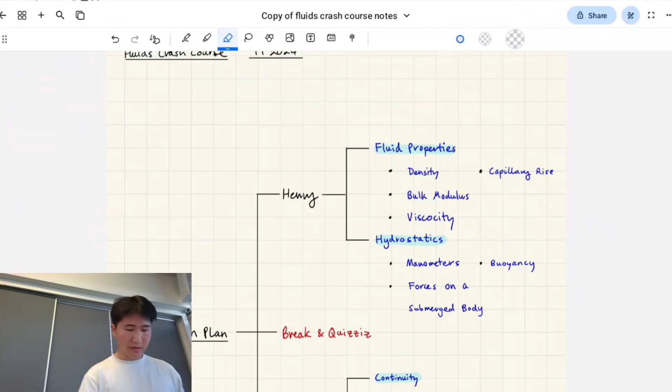First, I'll start with an overview of what you can expect in this crash course. I know in the second half, Zach, you saw it before, but I think for most of you guys, you haven't seen this before.

Basically, I'm going to be covering week one and about half of week two, the hydrostatics portion, before handing it over to Akshara, who's going to deal with continuity. By the way, unlike solids, this course has statics and dynamics. So her portion is the fluid dynamics portion, whereas mine is mostly statics.

Key topics I'm going to focus on are viscosity and forces on a submerged body. I'm focusing on these because in the workshop questions they kind of emphasize these. For capillary rise, surface tension, and buoyancy, I'm not really going to touch on them. Those are topics you're just going to have to refer to in your lectures because I won't have time, since this course is really loaded with a bunch of small topics, especially in the first few weeks.

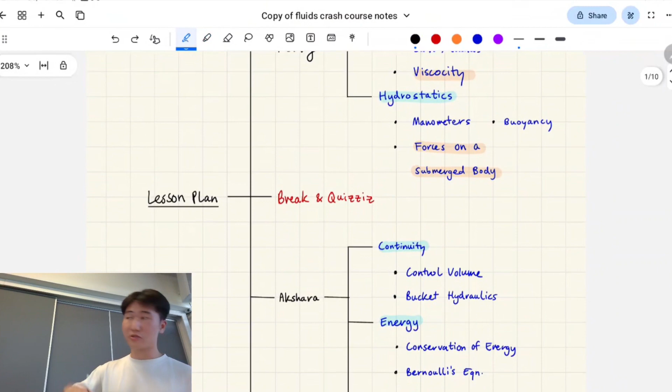We'll do quizzes to test your knowledge in the break. Then Akshara will touch on continuity, which is pretty much, if you remember back to dynamics in 1300, kinematics of fluids. And energy is basically kinetics of fluids. Momentum we won't touch on in this crash course, but you will do it in week 5-ish. The second half of the course we won't touch on at all, but hopefully this gives you a good foundation to work off of.

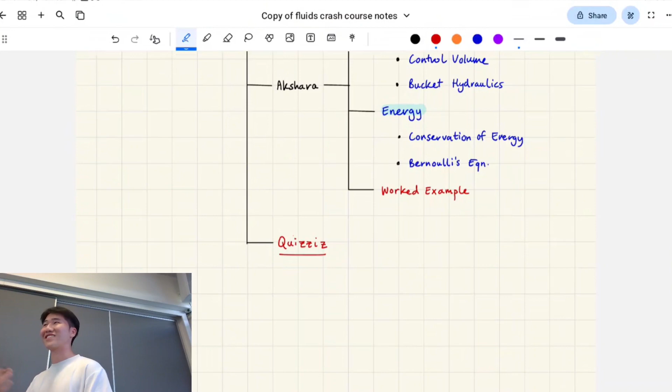She's also got quizzes, so we've actually got two quizzes for you. In the feedback we've gotten for these crash courses, people really like the quizzes because it's a good way to gauge how much you actually know. So hopefully that'll be useful.

All right, moving on to the actual content. I like to start really broad when I teach, and I've taught 1300 for two terms before, so I like to think of everything in terms of 1300. This course is built on the foundations of statics and dynamics, and those are built on Newton's laws. Newton's first law is the law of statics, which you can basically summarize from this simple expression: the sum of the forces is equal to 0.

That's when things are either not moving or in static equilibrium. For example, if I'm not moving right now, I'm in static equilibrium, even though I'm on a planet traveling through a solar system, which is not accelerating. When the sum of the forces is equal to ma, that's the case where things are moving, in other words, it's accelerating. That'll be useful for when you have pipe flow through water, for example.

Whereas the first case is better for when a body of water is still, and something you'll learn about called hydrostatic pressure - the pressure due to water's inherent properties building onto a gate, whatever, causing it to have a bending moment, for example.

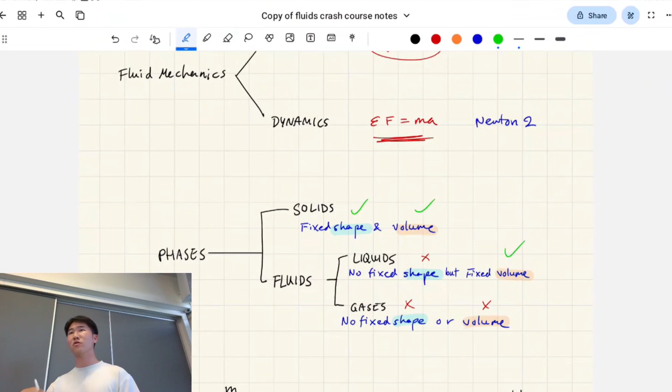Are we all good so far? Okay, let's talk about some fluid properties. The very first thing they dive into for this course is familiarizing you with what fluids are. There are a lot of common properties you'll need to be familiar with to do the calculations. The first one's density.

This one's probably the most intuitive. This is basically your mass, denoted by the Greek letter rho, and it's mass divided by volume. Sometimes they write V for volume, sometimes with a dashed line through it - either way, that's volume. In terms of units, this will be in kilograms per meter cubed. So density is a three-dimensional property, pretty much.

Unit weight - all you do to get unit weight is multiply density by 9.81, your gravity constant. Unless you're talking about aerospace or being on the moon, it'll be different, but every scenario they give you is just going to be this one. So basically your mass becomes a weight force instead. This is m times g, if you remember from physics. Since it's a force, it's in newtons per meter cubed if you're talking SI units.

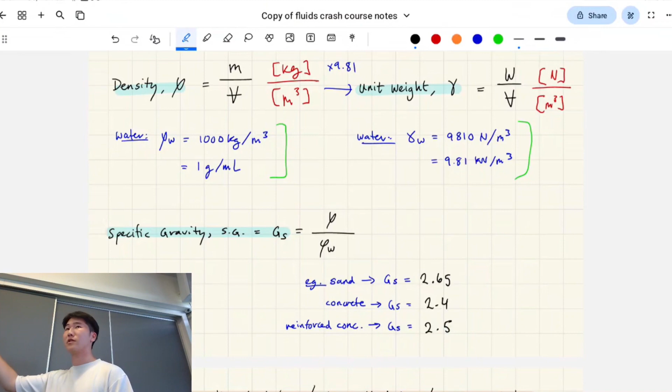Any questions so far? Okay. Raise your hand if you've done material science. Okay, it's all good if you haven't, because I'm going to go through these briefly. This isn't really assumed knowledge, but it's stuff they skip over, and it helps to know the background from material science. So it helps if you've done the course, but if you haven't, it's fine.

So the first thing to talk about, let me just pull up my notes quickly. The first thing is our elastic modulus, sometimes called Young's modulus. Even if you haven't done material science, you might have heard this from engineering studies in high school or physics - they might have brought up Young's modulus before. This is a measure of stiffness. We'll leave it at that for the moment - it'll make more sense when I bring up the other stuff.

The shear modulus is a related property, but I'll come back to that - just explain it later.

Basically, for solids, what I'm trying to point out here is that solid materials will follow these kind of material properties, whereas fluids are going to follow a different one essentially. So let me explain elastic modulus for a solid first, because it's going to help with explaining bulk modulus in a second.

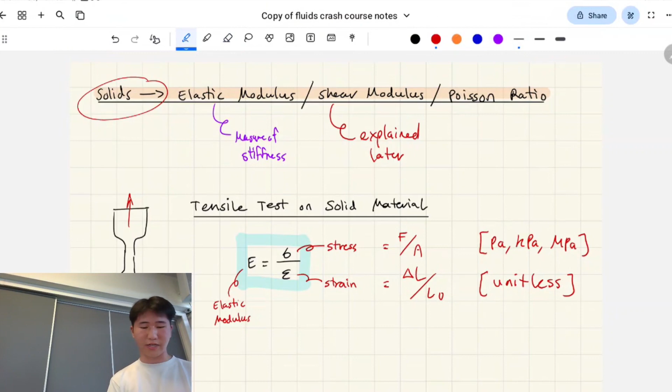In terms of units, you can find this in pascals, kilopascals, megapascals, and strain is unitless because you have meters divided by meters, so it becomes unitless. Pascals is newtons divided by meters squared, so that's like your force divided by area.

So when you have this tensile piece in a lab and you're testing it, it's being pulled apart. That force there is a tensile force, and your cross-sectional area is this one. So you can think of stress like a force, but it's distributed over an area.

You'll get very familiar with this in the second week of solid mechanics if you're doing that course. But if you have the same force and a larger area, for example if your cross-sectional area was actually that big, the stress on it would actually be less, because it's divided over a greater area.

In terms of strain, that's your original length for our test specimen, and however much it deforms would be your delta L, your deformation. So strain is just a measure of deformation, whereas stress is a measure of forces relative to your cross-sectional area.

They skip over this in fluids because they talk about what I'm about to talk about next. But it makes more sense to think about it in solids because this is the simple case basically.

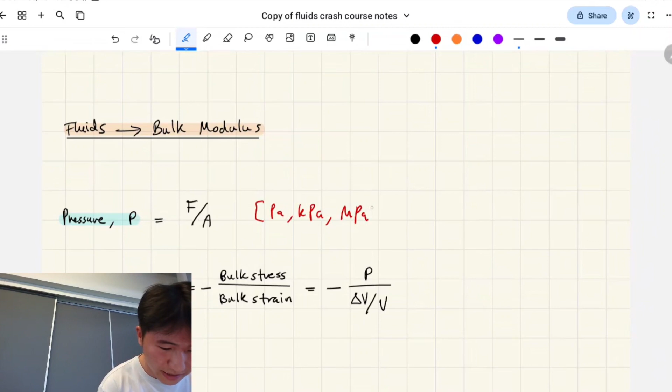So, bulk modulus. Essentially your bulk modulus is going to look very familiar because it's also going to be in pascals, kilopascals, megapascals. But essentially the difference is this applies for fluids. This is a fluid property.

So pressure is basically your fluid version of stress, think of it like that. It's also known as the bulk stress. Your bulk modulus is sometimes denoted by K, I think it's also sometimes denoted by capital B, but it's equivalent to your elastic modulus, but for fluids.

So it's about, instead of tension, it's about compression. Basically you're thinking about it like you're being compressed from all sides to have a reduction in volume. That's actually where this minus sign comes in, because since your bulk modulus is a measure of compressibility, the more the volume reduces, the more compressible it is.

Does everything make sense, hopefully, so far? Okay, cool.

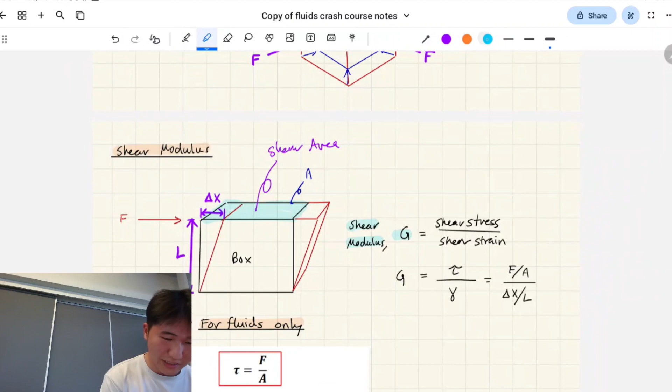Think of it like this. I've got a cardboard box full of, I don't know, CEVSOC merch or something right here in front of me. I'm pushing it like that. And the shear area is actually like here in that case, it's scraping against the ground, and the part that's in friction in that particular scenario would be our shear area.

And then in terms of shear strain, it's denoted by gamma as well. Don't be confused, this isn't the same gamma as unit weight. But it's about your deflection in this direction divided by the original length in the other direction, like that. Anyway, so these are all solid properties, basically.

Viscosity is essentially your shear modulus for fluids. And I'm going to write this down quickly.

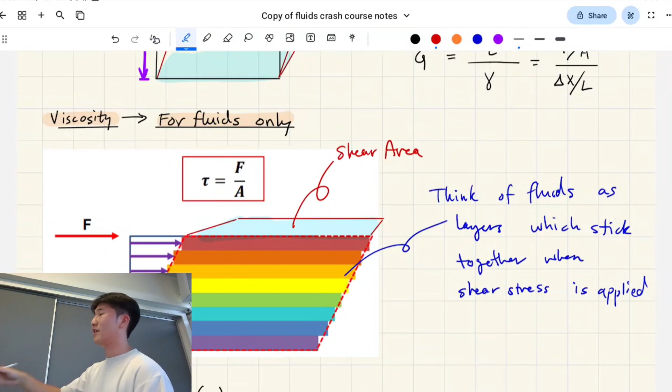You want to think about a fluid as layers which stick together as shear stress is being applied to it. Here's your shear area, basically. We've broken up this fluid into discrete layers, essentially, and they're trying to stick together.

So we moved on to velocity distribution. Have they talked about this in the lecture? Did they mention this? Yeah, I'm getting a nod over here and a head shake over here.

Do you have two lectures this week? It might be starting from the second lecture. Oh okay, maybe they didn't talk about it this lecture because they're talking about assessments and stuff first. It should come up very shortly, but this is like the first kind of loaded topic.

So imagine you have this scenario, right? Aim the camera over here. Basically, these are two plates, so you can think of it as 2D. One's moving, so it's being dragged by a force, and this one's completely still. Here I've overlaid two distributions: this one is your velocity distribution, denoted by u as a function of y being the vertical scale, and here is your shear stress distribution.

And this is your base case, your simple case, where we have a linear velocity profile. So that's linear, right? Let me just write out a couple things.

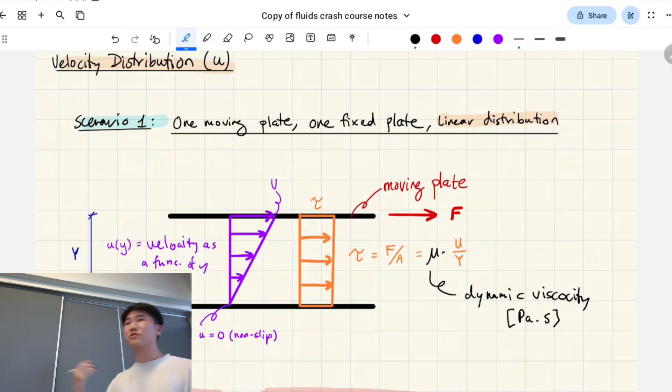There's another formula for this, which is very important. All right, so this is mu. I'll explain this—mu stands for dynamic viscosity. This is kind of a new concept. Its units are pascals multiplied by seconds, and it's basically a material property.

It measures the resistance to flow. You can see in the corner here, this is a predictable number for water—that's mu of water at 20 degrees. So you can see that it's temperature dependent as well. Our normal case is that it's at 20 degrees basically, so that's the number you're going to be using.

What I've drawn here, capital U divided by capital Y, this is your velocity gradient—that's your gradient, so the slope there. U max, denoted by capital U, is this number here, divided by your total depth. You can only use this formula if it's linear. It's the same as when you were graphing straight lines in year 8—remember this, y equals mx plus b, the slope m is rise over run. That's the same thing, but you're only allowed to use that as long as you're not dealing with a parabola or something. Yeah, straight line.

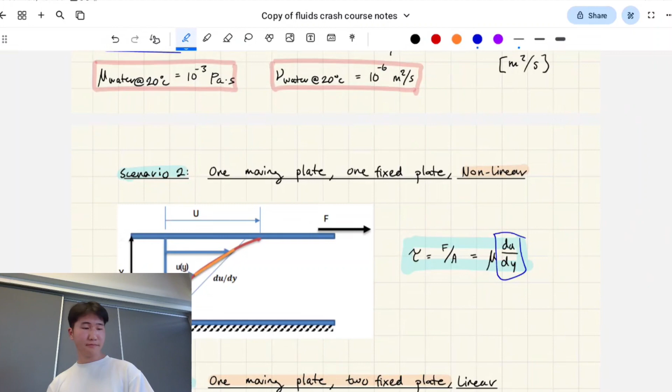The only thing that changes is that it's not necessarily always constant, because the gradient's not always constant. I'll show you an example where it's not constant—here you've got a moving gradient basically, so we have to use calculus, du/dy. It'll be a function of y.

I'm just showing you a few different scenarios here. In this case we have one moving plate, which is the middle one, and two fixed plates. Say we have a linear velocity distribution—what would the shear area be? You don't have to give me a number, but how would you find it?

I'll draw this out in a perspective view. That's the moving plate, being pulled this way. Here's your fixed plates on top and bottom. It'll be underneath, but also on top, wouldn't it? It's not just because of the fixed plates—there's fluid both above and below it, so your shear area is actually shearing here and here on the plate.

If this is B, B is your width going into the page—you can't see it in this elevation view, but I've listed B on the side. B multiplied by L, that's that rectangle there. It'd be 2 times that, because the top and bottom parts are both being sheared. So that's your shear area.

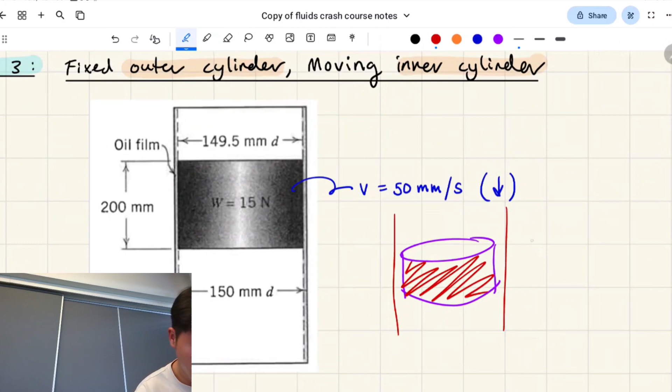This whole thing's moving down due to gravity—W is the weight force. Basically the shear area looks like this: it's on the outside of the inner cylinder. So that's pi d h, with h being your height. This is literally like geometry from year 9 or 10.

And your velocity profile in this question—you have to enhance to see this. That's how it's moving, because the fixed plate in the drawing I've done is on the left, and the moving plate, which isn't a plate, it's a cylinder, is on the right. Makes sense?

Here's another case: we have a fixed outer cylinder and a moving inner cylinder, except instead it's twisting—you have torsion essentially acting on it. So what would the shear area look like, you reckon? Again, this is parallel forces you're thinking about—it's going to look like this.

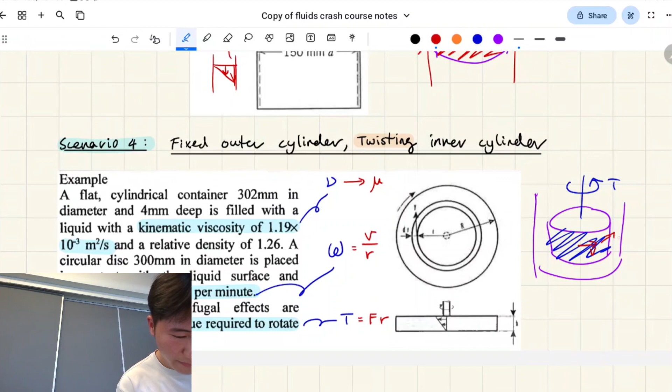So essentially the same part of the cylinder is shearing, it's just the force being applied kind of this way rather than that way.

Any questions? Is this the only four scenarios we're going to get? The only possible scenarios? This is the most complicated one I've seen, so it doesn't get any harder than this basically.

I didn't cover surface tension, capillary action, and vapor pressure, but these are still part of your week one fluid properties, just lesser topics. If you want a good read, I've sent through Barney's notes—they're incredibly good and have all the formulas you need in case they throw you a question. But in the workshop questions I didn't see anything on these topics. It might just randomly show up as a multiple choice in a weekly or midterm, so it's good to study as a low priority thing.

I haven't talked about hydrostatics yet, so I'm going a bit slow. Before this I was just talking about general fluid material properties. Now we're talking about hydrostatics, which is for bodies of water that don't move.

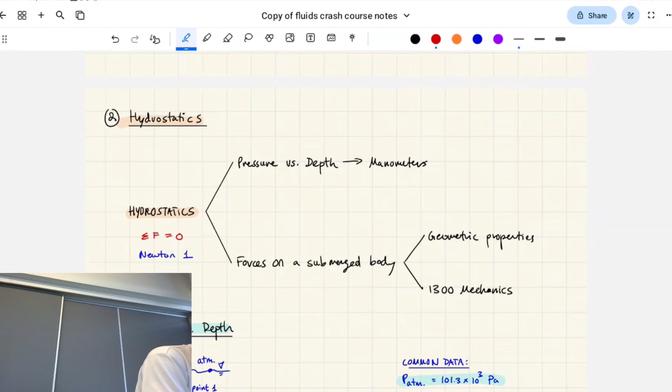The first thing to realize is that pressure varies with depth.

It varies linearly, essentially. This is kind of a gruesome example, but do you remember the submarine full of rich people that went down? OceanGate, yeah. It went really deep into the ocean and it imploded due to hydrostatic pressure, and everyone inside got compressed essentially. That's what bulk modulus can do, it's about compression forces. As gruesome as that is, it's good to think of that scenario when you think about what water does in terms of hydrostatic pressure.

So we're just going to dive into it. We have two points randomly drawn here. Do you see how I've drawn them laterally, a bit off center? It's because the only thing pressure varies with is depth, not horizontal position. So we can still do calculations on these two points even though they're far apart that way.

Here's the general formula. The pressure at spot 2 is the pressure at spot 1 plus your unit weight multiplied by height. Alternatively, you can call this rho g if you're doing your calcs that way.

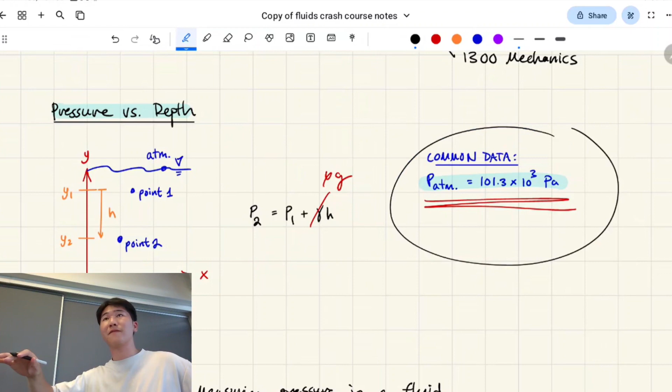Otherwise, actually, you know what, I'm kind of overcooking this explanation, we'll leave it at that. But just keep in mind there are two types of pressure: absolute pressure and relative pressure. Absolute pressure would include your atmospheric pressure as your baseline, but relative pressure is only the pressure added on top of your atmospheric pressure.

So you'll see that come up in questions. Do we have questions so far? Yeah, I'm gonna go a bit quicker.

Manometers are just a measuring device for measuring pressure in a pipe system. Here's a cross section of a pipe, so there's a pipe flowing in and out of this page like that. Then you have your manometer connected to it. The base case is that on one end you have your pipe and the other end it's open to the atmosphere, and then you're given this fluid height, and you calculate the pressure in the middle of the pipe.

Here we have a U-tube manometer, and you're given atmospheric, it's touching the atmosphere here. You have to add on the pressure due to mercury, and subtract off the pressure of water. So it's going to come up with some pretty funky equations, but I'll just jump on.

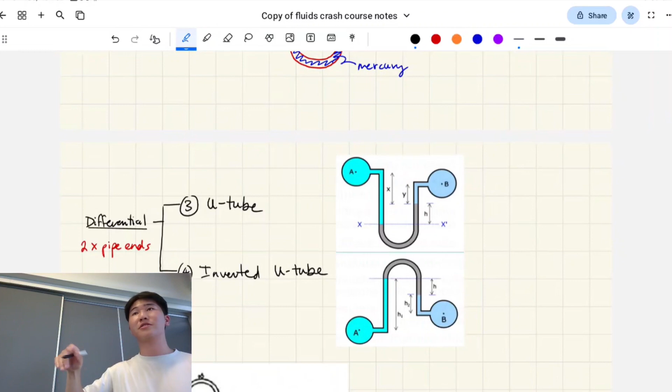Here's another case, these are your differential manometers, which have two cross sections that are measuring off of each other, so it's not connected directly to the open air. Here's an example of an equation: the pressure at B is equal to the pressure at A minus this pressure. It's minus because your depth is decreasing, as in it's going upwards, and since it's going upwards you're relieving pressure. You're relieving pressure again, and then finally you're adding pressure for this third type of fluid.

Does that make sense? Okay, sorry, this makes more sense when you do the questions than if I'm just loosely explaining it to you.

Here's my last topic that I'm going to talk about, and this one helps if you've done 1300. Can you put your hand up if you've done 1300? I actually already knew the answer to that question, sorry Anushka. But yeah, basically, this is the only part of this course where statics from 1300 comes in.

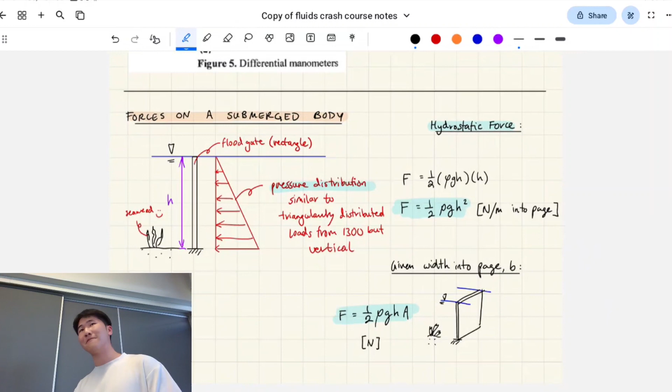So I'll show you the default case. Here you have a floodgate, which is a solid material, and you have this pressure distribution due to water, which linearly increases, like I've been saying, so you have this triangular distribution. Here I've drawn some seaweed, but this is just to show you it's an elevation view, so side on, basically.

These are the general formulas, but let me show you how everything plays into account. So we're looking at this floodgate, where H is the height of the floodgate. Here is rho GH, which is your pressure at this depth, measuring the biggest part of that pressure distribution. The way I've gotten the force is literally the area of that red triangle I just drew: half times your base times your height of the triangle. That's it.

However, this is newtons per meter, because this is per meter run into the page. Your actual force, if you're given a width b, that b dimension goes into the page. That's the one we can't see in that diagram.

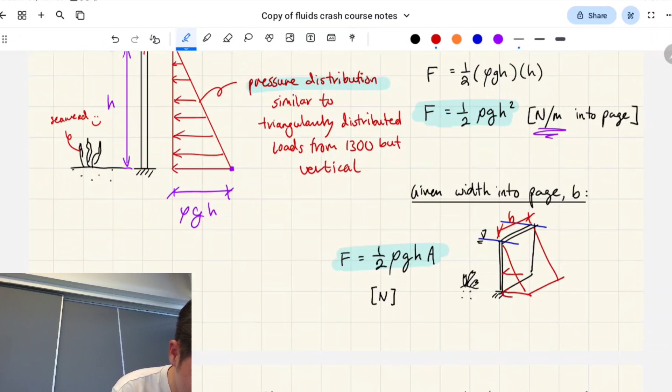That's our pressure distribution prism, it looks like that. Rho GH, that's H there. That's our seaweed. So the actual force is the volume of this pressure distribution prism, this 3D shape. That's how you calculate the force.

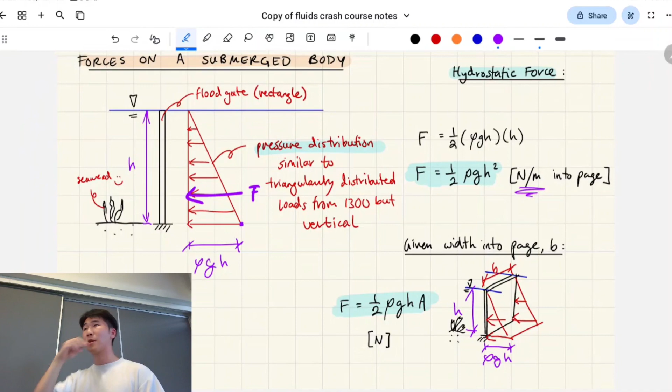From 1300, you might remember your equivalent point loads, which is just reducing this distributed load into one point load. It works the exact same as it does for loads in 1300. So for a triangularly distributed load, it's 2/3 from the small side, 1/3 from the big side, and the force is just what we calculated before. That'll make sense later, I'll elaborate on that.

So here's our first scenario. Basically before, our gate was touching the top, so it's a triangularly distributed load. However, now our gate is some amount of depth into the water before it even starts.

So the pressure on the gate is actually going to be trapezoidal. By the way, this is just a stupid thing, but you're going to see this come up a lot: this is the gate, except they don't explain what this is - this is the cross section of the gate. It's like if you're looking at this gate, that's your eye view. It's not some random gate that's just there, it's the same gate, just viewed from a different angle. They never explain it to you, but that's what it is.

Here's the pressure distribution acting on this gate, so it's actually like that. Anyway, so we have a P min and a P max this time. We're just measuring the dimensions of our trapezoid essentially, and then we have that formula. Here's our pressure distribution prism, and in order to get the force, you get the volume of this shape, and then you get the force.

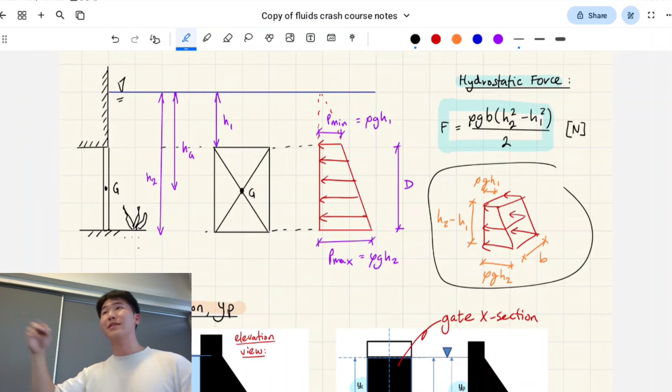Point of application, YP, that's this depth here - my notes. So basically YP is what I was talking about earlier, so this would be YP. It's the point at which you're applying your force on your gate, it's where the concentrated loads would be.

For a trapezoid, it's a little bit harder to find, because YP is like this number. YP is kind of a bit harder to find when it's a trapezoid, essentially, because it's not necessarily 2/3 from the small side.

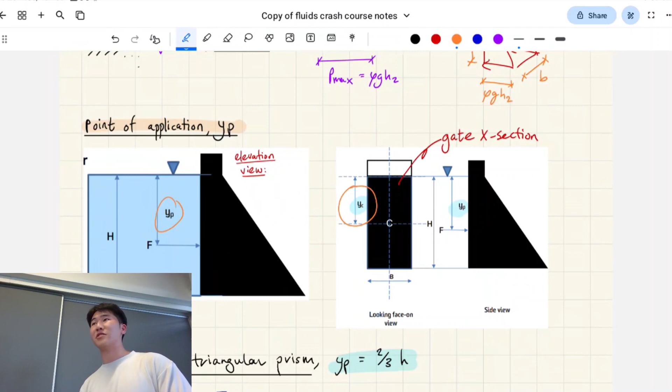YC, this is where your solid mechanics will come into play, because YC is your centroid in the Y direction. That's a geometric property of that gate, because again, this gate is a solid, it's not a fluid, so we have to apply our solid mechanics knowledge to this. This is what I mentioned earlier: for a triangle, YP is just 2/3 of the height, so two-thirds from the small side.

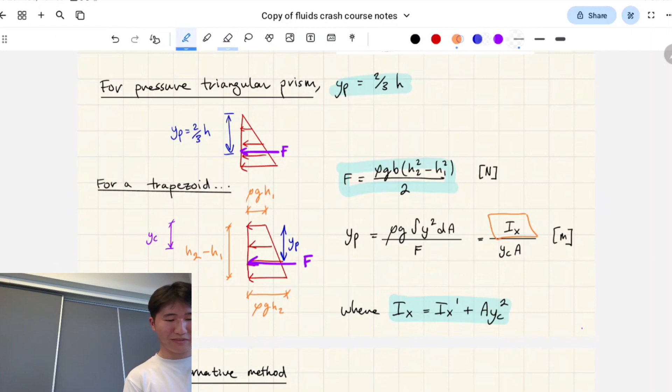Okay, I'm just scaring you because I think there's a better way to do it than integrating. You can apply this formula if you like, but this is your parallel axis theorem, and this is your moment of inertia, a geometric property from solids. Sorry Nishka, I'm probably speaking a different language to you right now. We'll run over this later, but I'm conscious of time so I'll speed through. I'll send you the relevant part of my solids crash course so this makes more sense.

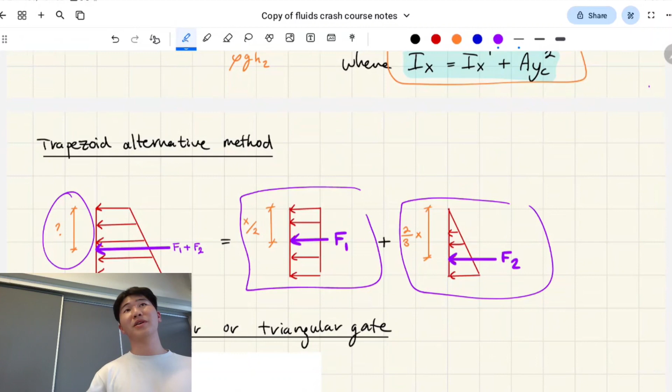This is useful when you have gates which aren't rectangles. Rectangle is the default case for gates, but here's a triangle they could run in the lecture, and you might have a circular gate - I've run a circular gate in one of the questions before, that's why it gets tricky. Here's my trick for trapezoids though: the easiest way is breaking it up into a rectangle and a triangle, since that's all a trapezoid is. When you do that, you can find the forces very easily, as well as the point of application, since that's hard to find for a trapezoid directly.

Yeah, that's the end of my section. These are some geometric properties, your moment of inertia from solids. Does anyone have questions? All right, let's do a quick smoke break, then we'll do a quiz, then hand it over to Akshara. How about that?

All right, so yeah, 36%, let's go. Last time was 25%.

Okay, so bulk moduli - it's a measure of compressibility, but basically a higher bulk modulus means it's less compressible. So a solid has a higher bulk modulus than water, which has less than air. Do you remember the negative? The negative makes it the other way around. Steel has a value that's basically negligible - that's why it technically exists, but since the number is so irrelevant for compressibility of a solid, they don't really care about it.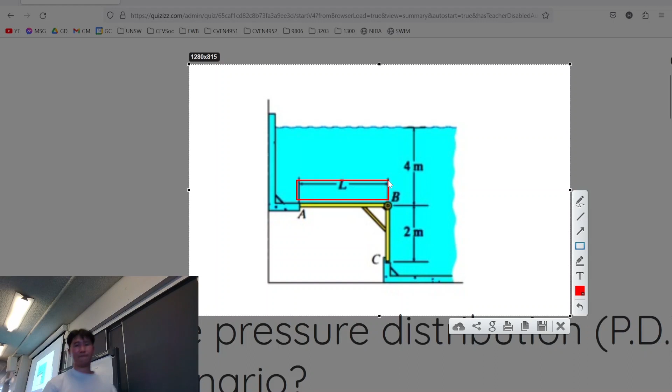This one's a hard question conceptually, but I wanted to include it since I didn't have time to talk about it, so I thought I'd see who could have a good crack at this. I'm going to overlap this - the pressure distribution at these two points, because they're at the same height. Point A and point B are at the same depth, so they have the same pressure, meaning we actually have a uniform pressure distribution, and the pressure is acting at the gate, that point of focus - put down arrows acting at that. Whereas between B and C it varies with height, and it's not going to be a triangle because we know it isn't on the top surface. This is the case we talked about before, for this part of our gate. This is kind of new - this uniformly distributed part only happens when we have a completely horizontal surface.

This way? Yes. Good. Just when you're ready. Okay, alright, try that. Ready? Oh thank you. So we're going to learn about - oh my god, this thing, it's a bit of a - wait, should I mute? Okay, but they'll hear it in your laptop, right? Okay, it's fine, okay.

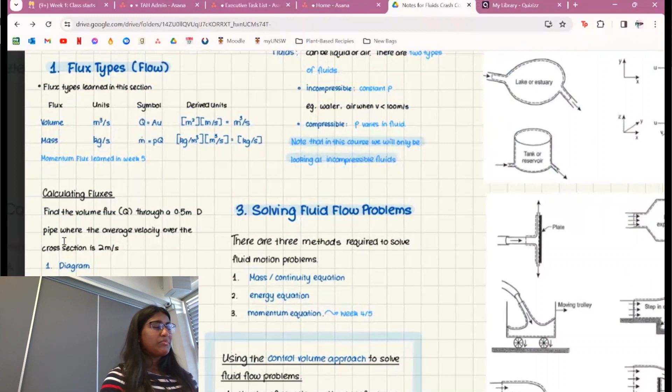So continuity - this is the second week of the fluids course. I'm going to delve into the different types of continuity questions you guys could get. They're all largely based around the same principle though, so as long as you get the principle of conservation of volume and mass, you should be able to solve any continuity problem. Then in the second part of my section, I'll delve a little bit into the energy equation and Bernoulli's equation and how that relates to continuity.

Okay, so starting off with the first concept, flux is basically another word for flow. In your continuity problems, you will be asked about 3 types of fluxes, 2 of which I'm going to go through in quite a bit of detail.

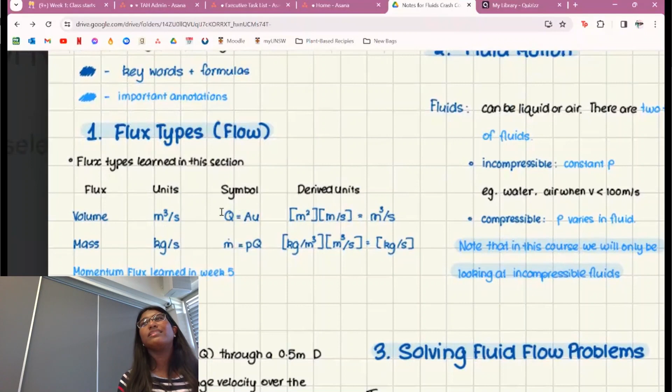The first one is volume flux. The units for those are meters cubed per second, and the symbol is Q. Before I go on, I found with fluids that the units caught me out in a lot of questions, so I would be really careful when converting between the units in the question and the units they ask for in the answer.

The second part is mass flux, which is similar, but it's in a mass per time form, so kilograms per second. The symbol for that is M with a dot above it. The equation is density times Q, which you found up here. So for example, a question might ask you to find the mass flux of a control volume, which I'll explain in a second. But if you have to find the mass flux, you usually have to find Q, which is volume.

And then the third one is momentum flux, which you guys will learn a bit more about in week 5. But it's a similar concept as well.

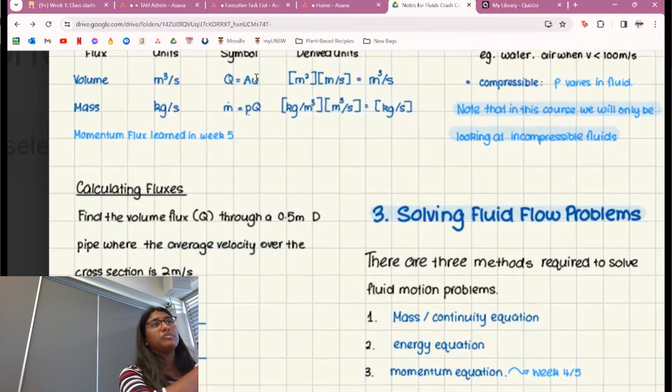I think the easiest way to explain what flux is is to go through a very simple example. This one is just finding the volume flux Q through a very simple system: a 0.5 meter diameter pipe, and they've given you the average velocity over the cross section. You'll notice that in the volume flux formula, you've got an A and a U. U represents the average velocity, which they've given you in the question, and A will always represent the cross-sectional area through which the fluid is flowing.

So in this case, with a pipe with a diameter of 0.5 meters, we have to find the area of that circle before we find Q. I've done the working out here - I've inserted the area of a circle formula, and then multiplied it by 2, which is the average velocity given in the question. Does everyone understand that example?

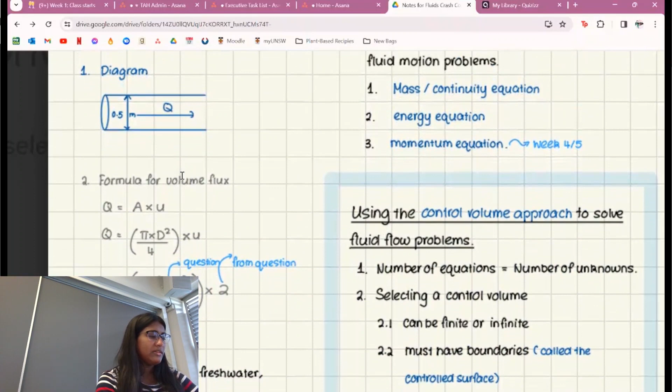Another way they could make the question more complicated is by including mass flux, which would get you to consider the density as well as the volume flux. Here they've given us the same question, but with 2 different formulas - one for freshwater and one for seawater, both of which have different densities. It's almost the same - you just take the Q you found in part A, 0.393, and multiply it by each density to get your mass flux.

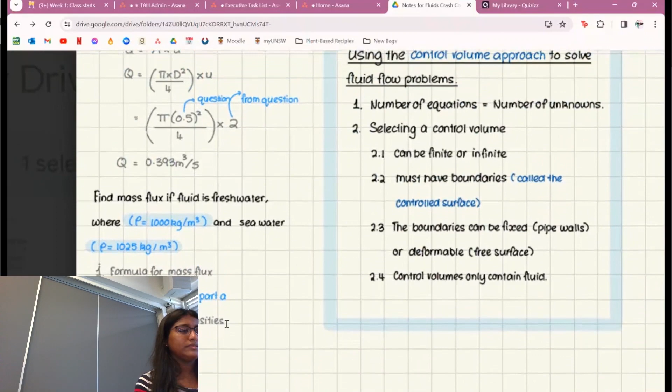Okay, just a bit of terminology before we move on. Often in this course you'll get a few terms thrown around, two of which are quite important: incompressible and compressible flow. Fluids in general can be liquid or air, and depending on which one it is, that determines whether it's incompressible or compressible. Incompressible fluids, which you'll be working with pretty much all throughout this course, have constant densities.

That's usually water of any kind, and then air when the velocity is less than 100 meters per second. Compressible fluids are where the density actually varies in the fluid, but you won't really be looking at that in this course. Does everyone understand the difference?

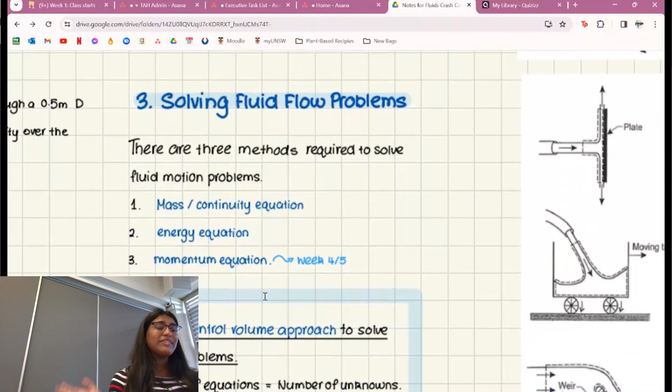Okay, so the third section of this unit is solving fluid flow problems. You'll remember I mentioned that the principle behind all of these problems is pretty much the same. There are three methods you can use to solve fluid flow problems, two of which I'm going to go through with you today. The first is the mass/continuity equation, the simplest equation you can apply to any continuity problem. The second is the energy equation, which I'm going to go into depth with in the next section. The third is the momentum equation, which you guys will learn about in week 5 or week 4.

Before we get into any actual problems, I just wanted to run through quickly what a control volume is. Understanding what a control volume is basically allows you to visualize any pipe flow or fluid flow problem. When you're given a problem, you won't always be given the diagram, which means you often have to visualize it yourself and draw the diagram yourself. You can't really do that without defining your own control volume.

That means determining where your fluid is flowing, the direction it's flowing in, and the shape of the water storage section. For example, if you've got a pipe expansion, or water flowing out of a tank, then that storage section will be like a cylinder.

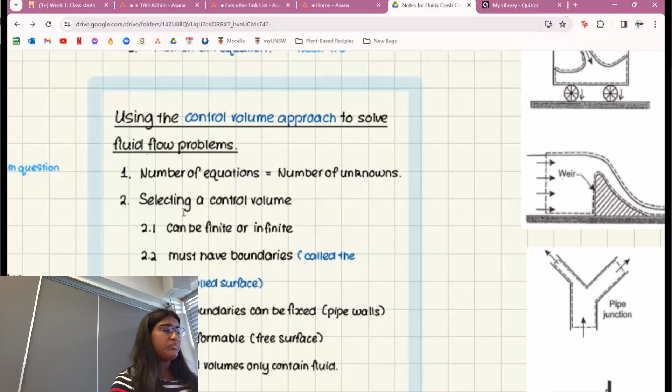The second part is to select a control volume, which I will go into the different types in a second. A couple of things to consider when defining your control volume is that it can be finite or infinite, but it has to have boundaries, called the control surface. The boundaries can either be fixed or deformable, like a free surface, for example. And the control volumes can only contain fluid, so liquid or air.

Here we have some examples of control volumes. The first three are kind of important with the diagrams to the right. They show that with each continuity problem, depending on what your control volume is, that will tell you whether you're working in a single dimension or multiple dimensions.

As you can see in the first problem with the pipe junction, you're only considering the horizontal direction, or the flow velocity in the horizontal direction. But then once you get down to the tank or reservoir, there's obviously a change in depth as well, so you're considering the Z direction as well as the Y direction, because you've got quite a large storage area that considers both the X and Y direction.

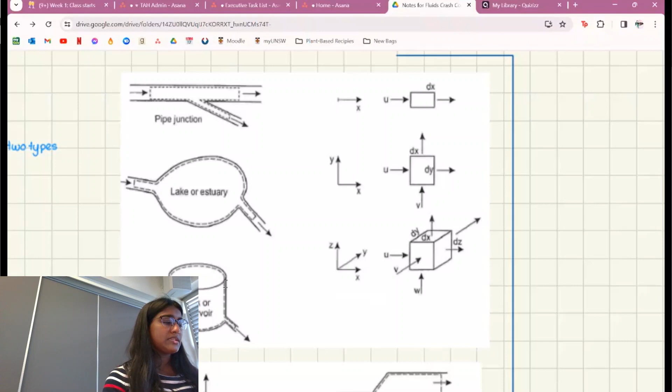Other terms that you might hear when solving continuity problems are pipe expansion - I'll go through a pipe expansion example with you in a second - things like moving trolleys, weirs, plates, and pipe junctions, which I'm going to go through as well. They're all types of control volumes that will help you visualize a continuity problem.

Okay, so I'm going to run through a couple of examples now - continuity examples. The first one I'm going to go through is using the continuity equation. Remember, that's our first method out of three methods to solve pipe flow or fluid flow problems. We're going to use the continuity equation to solve an example in a finite-sized control volume.

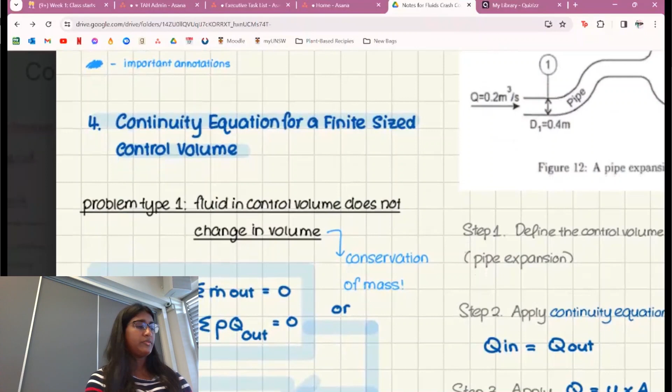Problem type 1 is a fluid in a control volume that does not change in volume. This is where the input is equal to the output in mass and volume. This is the derivation here, but it basically is derived to become this equation: the sum of the volume flux inside the control volume is equal to the volume flux out that leaves the control volume.

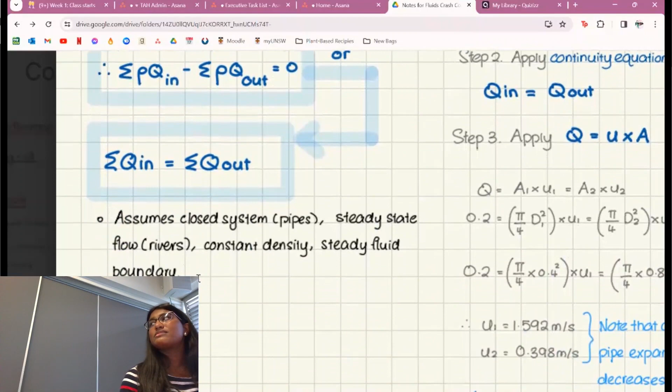If you're going to note down anything, I would say make sure you note down these, just because they're the assumptions that you make when using this equation. We're assuming that we're in a closed system, like pipes, for example. We're in a steady state flow, which could be a river. We're using a constant density, which I mentioned when defining our control volume - that's very important. And we have a steady fluid boundary.

Okay, so this is the example here. All they're asking you to do in this question is to determine the velocity at point 1 and point 2. As you can see, at point 1 we've got quite a small diameter, 0.4, and then the diameter doubles at point 2. So they've given us both diameters, they've given us the volume flux at point 1, and they're asking us to find the velocity at point 2.

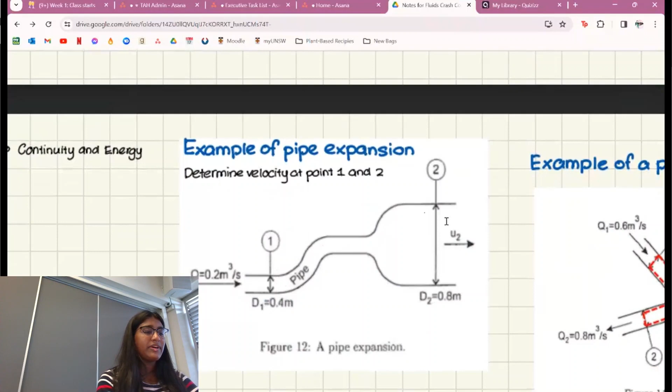So just before we get into the solution, does anyone have any idea how we might get more information from what they've told us already? About point 2, I mean, because they've only given us the diameter at point 2.

No, actually. So these questions, the continuity equations, they don't include pressure because we're only considering the movement of the fluid. Sorry, what did you say?

Almost. So remember, this is continuity, basically. The whole idea is that the volume flux going into the pipe is equal to the volume flux going out of the pipe, which means that even if they haven't given you the Q at point 1, it doesn't matter because the Q at point 2 is going to be exactly the same.

So as you can see in this example here, the first step is to define your control volume, which is a pipe expansion. Step 2 is to apply the continuity equation.

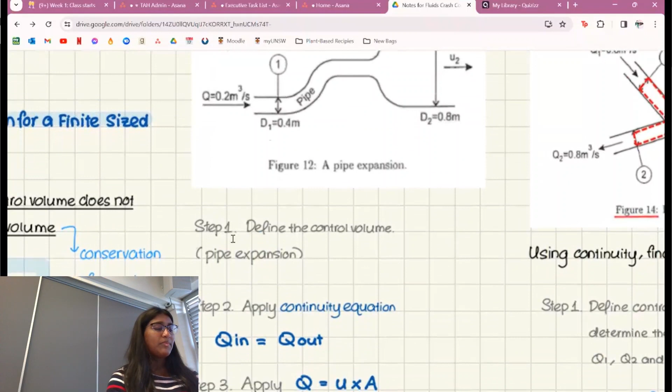We know that Q is equal to the velocity times the area, which means we can sub them both into this equation here. Regardless of how quickly the fluid is flowing through the pipe, both Q's are going to equal 0.2, which is why we can put the 0.2 in the middle of this equation here. Can you guys see that?

Okay, so here you sub in your point 1 values, and here you sub in your point 2 values. At point 1, your diameter is 0.4 squared. We haven't been given the velocity at point 1, but we have been given the velocity at—

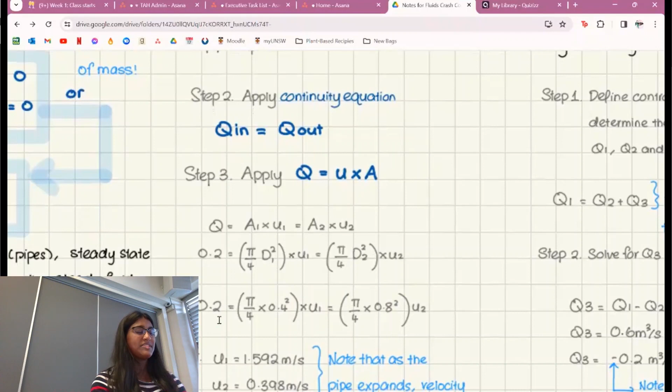Oh no, I lied, sorry, my bad. You haven't been given the velocity at all. So you just use the Q and separately solve each equation to find the velocities at point 1 and point 2. Does that kind of make sense there?

It's equal signs, right? So 0.2 is equal to all this stuff, U1 is equal to all this stuff, U2. So you solve that part as U1, and that one is equal to that one for U2.

I think people thought that was a plus before. No, I just made that mistake explaining it to them. But you solve each equation separately to find the velocity at point 1, and then you use the same value to solve for the velocity at point 2. Point being, 0.2 is equal in both cases to the volume flux.

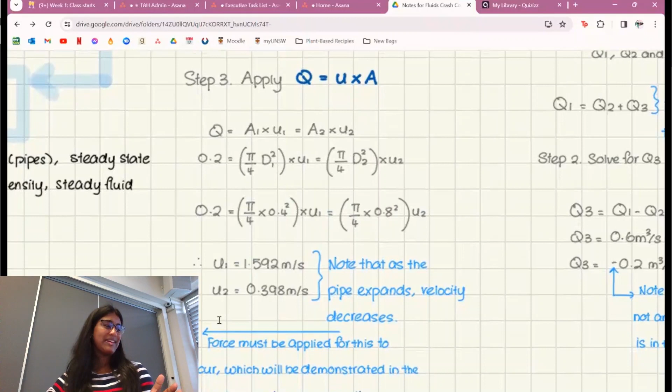Something to note in these types of equations is that for the continuity equation to work, or for the velocity to be changing according to the area, a force must be applied for that to happen. But that will be demonstrated in later units where you include the momentum and energy equations, because that will describe the relationship between pressure, velocity, and density. Right now, we're just focusing on velocity, area, and volume flux.

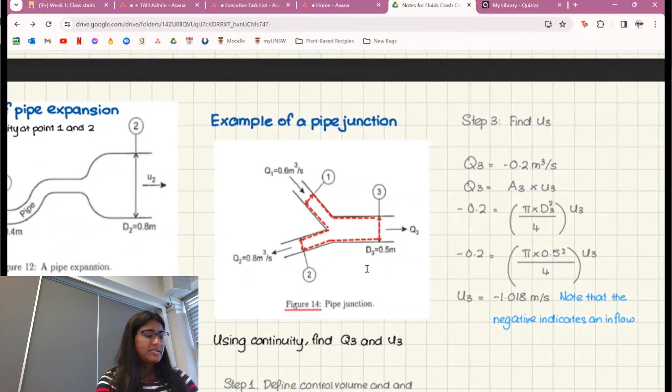Question 2 is a pipe junction. The only difference between this question and the previous one is that we have more than one exit point or input point. So one thing that's really important when dealing with a pipe junction is that you have to define your input and output sections.

So based on the arrows in this diagram, I've said that the input is at Q1, so I know that the input is 0.6 meters cubed per second. Can somebody tell me what 0.6 would be equal to, given that that's the input, and then the output is up to you to write down? In terms of Q, what would the output be?

It would be Q3 plus Q2, given that you are defining—or I defined—Q1 as the input. Correct, yes. So that is the application of the continuity equation, which is down here.

Okay, so what I wrote down here is kind of misleading, but the sign doesn't actually matter, right? That's the rate of the flow. It doesn't actually matter what sign it is, unless they're asking for a direction, which in this case they're not.

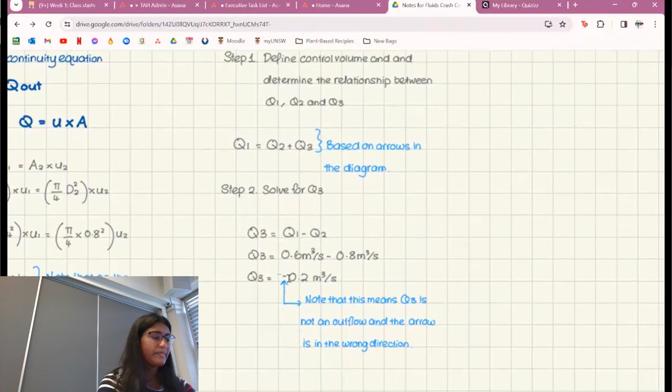So in this question, they were actually asking us to find the average velocity at point 3. After we found Q3 there, once we find the relevant volume flux, we can always find the velocity as long as we have A, which we can find out through the diameter.

As you can see, it's 0.5. And then very similar to the previous question, you just sub it into the Q equals A times U equation, and that gives you the average velocity here.

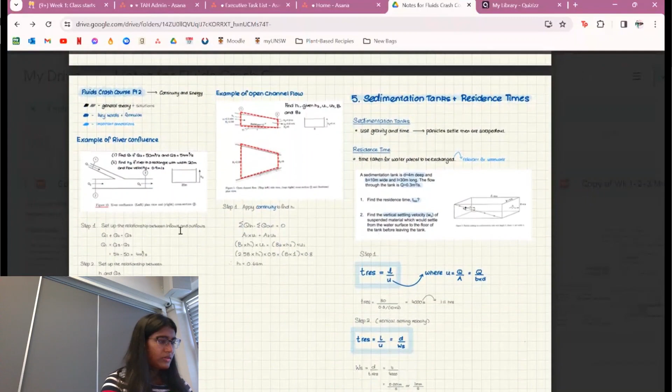I might just... oh, you know what, this question is kind of important. We'll do this one too.

This example is a river confluence, which is another type of continuity problem you might be taught about in your course. There are two parts to this question: Part 1 is finding the volume flux at point 1 given the other two volume fluxes, 50 and 54. Part 2 is finding the height of the river if it's a rectangle, which is their control volume, drawn out here.

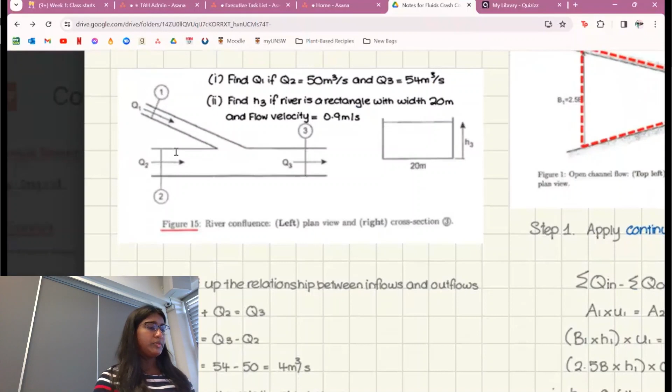Let's not worry about part 2 for right now, let's worry about part 1. Again, we're setting up our input and output equation. Here, they've said that Q1 and Q2 equal your input, which means Q3 must equal your output. So what they've done is used the given values 54 and 50, and minused them to get Q1, which is 4 meters cubed per second.

Then they've moved on to part B. Does everyone understand how we got to part A? Okay, so part B is finding the height of the river, given that now we have Q3.

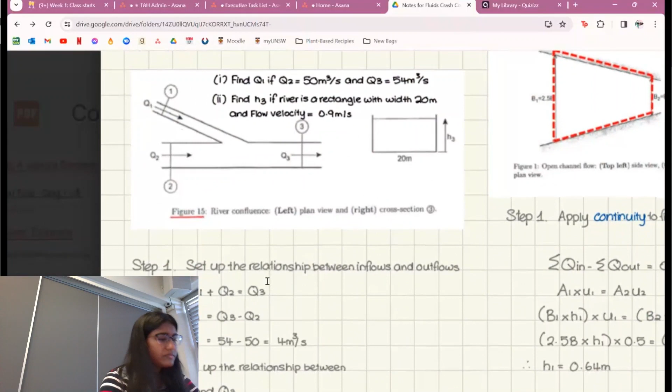So they've told us that the river itself is a rectangle, and they've drawn us the rectangle here. We know from the question that the length of the rectangle is 20. So all we have to find is the breadth, or height, of the rectangle, which we find by subbing in 54, given in the question.

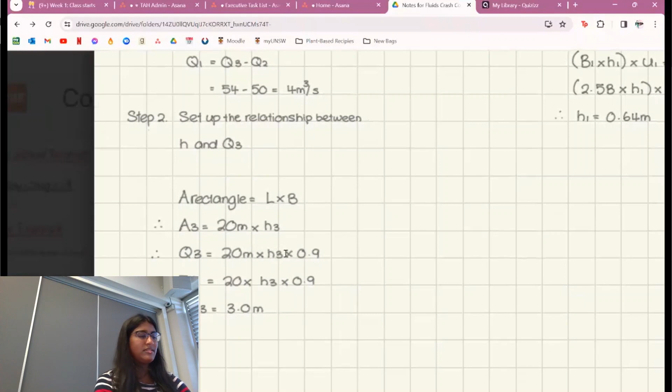And by using the length and... hold on, the flow velocity. They gave us the average velocity here, 0.9 meters per second, which we sub in as U, and this part here is just your A. So then you just solve that like a regular algebraic equation.

Sorry, I kind of forgot what happened there. Did that make sense? Okay.

This is a very similar example, I probably won't run through it right now, but again you're just using the same continuity equation. You're breaking the A component up into the right area formula, which is actually quite important. You have to figure out what your cross-sectional area is, so as the water is flowing through, you need to know that area so you can correctly sub in the right values into the Q equals A times U equation. That's how they found H in this question.

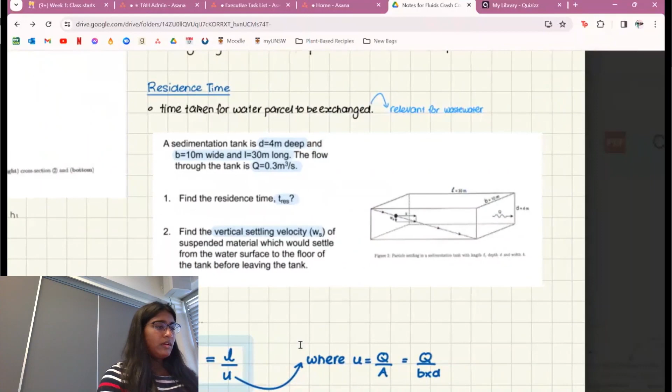Okay, part 5 is the sedimentation tanks and residence time section. Sedimentation tanks are something you'll learn more about in wastewater, but it's important to know what they're used for right now.

Basically, they're just tanks that use the change in depth of the water level to figure out how quickly the water is flowing out of the tank. So let's say it's filled at a certain time, they'll use the change in depth over time — like at the end of the day they check it again — and use that length to determine how quickly the water flowed out of the tank.

Another term to remember is residence time, which is the total time taken for the water parcel — basically the water stuck in the control volume, that has entered the tank and is now flowing out — to be exchanged. This is the residence time, or T-res as it's notated here.

In this example, this is the sedimentation tank. It's a bit difficult to see, but the length of the rectangular prism is 30 meters, the breadth is 10 meters, and the depth is 4 meters. One thing to note is that your Q is given, so the cross-sectional area is this rectangle here, and Q equals 0.3 meters cubed per second.

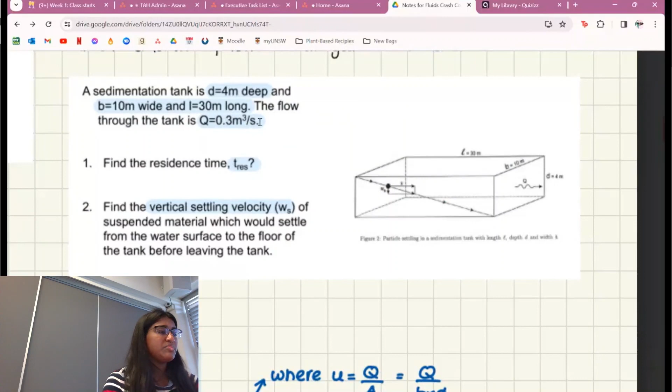So the first step is to find the residence time. I've given you the formula here, so if you want to note anything down, I'd write that one down. You'll need to do a bit more maths here to figure out U, because they haven't given you the average velocity yet, so no worries.

We go back to the continuity or volume flux equation and rearrange it to make U the subject. They've given you Q, you find A using breadth times depth, and U eventually gives you 0.3 over 40. Then you know the length is 30, so that becomes 4,000 seconds, and you just convert it to hours to find your residence time.

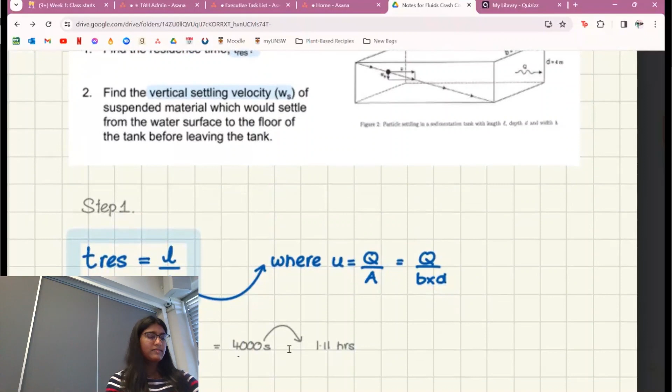To find the vertical settling velocity, which is how quickly it takes for the water level to go from this height to this height, you use a very similar formula. They've just got L over U equal to the depth over the vertical settling velocity. So it's the same equation, except you're dealing in the vertical direction.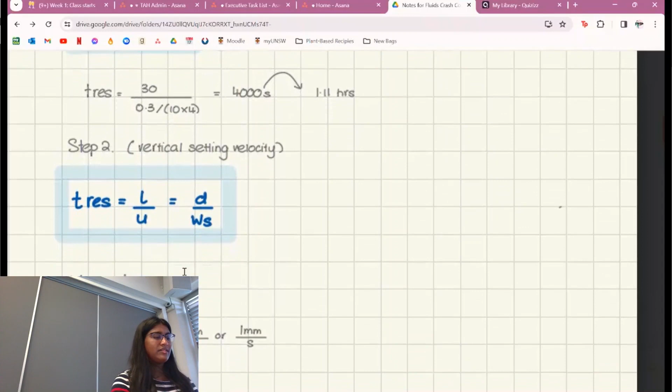In this case, you'll notice like in the first part of the question you use the length part, which is the 30 meters. Here you use the vertical change in distance, which is the depth. And then you put that over the vertical settling velocity, rearrange it, and then you get your vertical settling velocity. Does that example make sense to everyone?

I might leave this section for you to go through in your own time, but I'll just explain the concept behind these two questions very briefly.

Sometimes when you've got a storage container, it won't be as nice as a cylinder or a rectangular prism where the cross-sectional area is fixed. Like in a tank, if there's water flowing out, the cross-sectional area isn't changing - it's just the volume flowing out constantly. But sometimes you have an area that's decreasing.

Think of a funnel - the water is flowing out, but the area is changing over time. Here the diameter might be this long, but then here it might only be a small circle. So in this case you actually have to use integration to account for the change in area, which will affect the velocity and how quickly the fluid flows out of the tank.

What's happening here? Sorry, I'm trying to assist with this. Oh, that's okay. Yeah, but it's, okay.

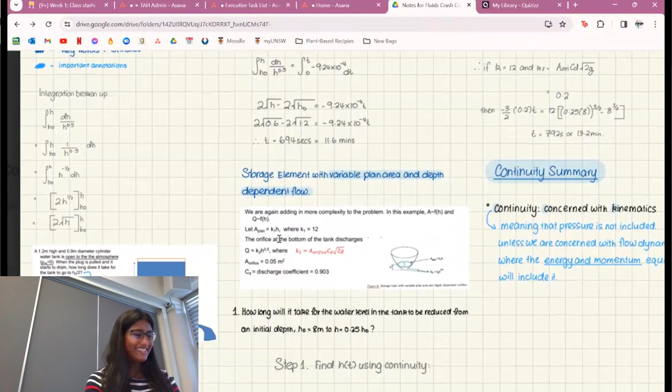Does everyone understand the concept behind that problem? So here I won't go into too much detail, but see how you've got a cone here in this part? You can see the area changing as well as the depth. So we've just used integration to figure out the change in velocity over time.

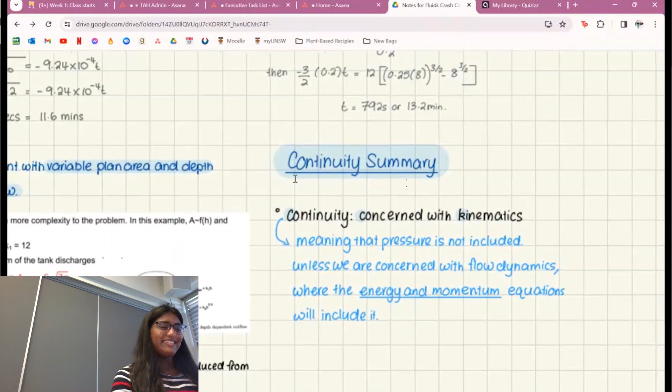Before we move on to energy, something important to note is that continuity is only concerned with kinematics. I kind of highlighted the syllables there to help you remember. But why that's important is because, going back to what we were discussing before, we're not actually concerned with pressure at all if we're working with kinematics. We're only concerned with the movement of the fluid and how quickly it's moving through the exit point.

When you include flow dynamics, that is when you will incorporate the stuff Henry was talking about earlier, which is the pressure at a certain point. And there is a way to relate all of those things together, which is the energy and momentum equation, which I'm about to get into.

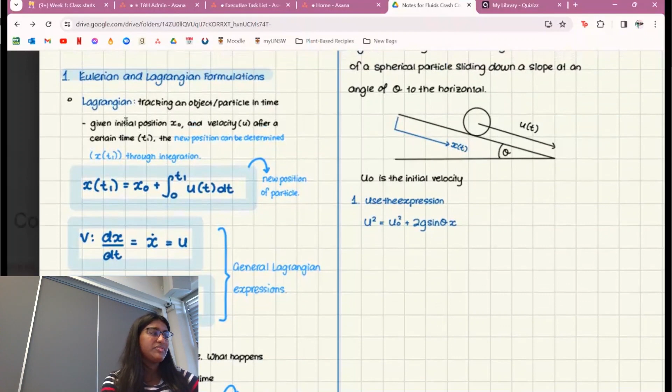This is not really too important, what is happening here. This is just an explanation of the fluid formulations you might deal with. So the difference between Eulerian and Lagrangian formulas - you don't really need to know all of this maths, you just basically need to know the difference between the two. So don't get too freaked out by what you see on the board right now.

Lagrangian is basically tracking an object or particle over time. So given the starting position of a particle and the velocity, how far will the particle be at this time, or what is the time when the particle is at this point. The Eulerian formulation is like a grid, and that's basically asking what is happening when you pick a specific point in space and time - like what is the velocity at that point.

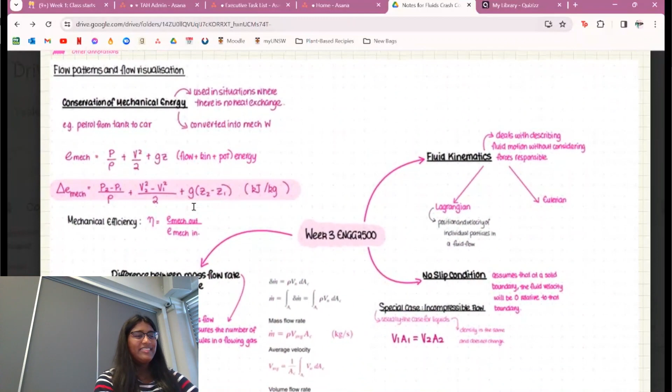Okay, now we're moving on to energy. So this section here, these notes are from when I did fluids. You don't need to pay too much attention to what's happening here if you understand everything I just told you about continuity, but I just wanted to include it.

Because this is your general energy equation here. As you can see, it's the relationship between pressure, volume, velocity, density and depth. So that equation is really important - they'll use it in a lot of your problems going forward.

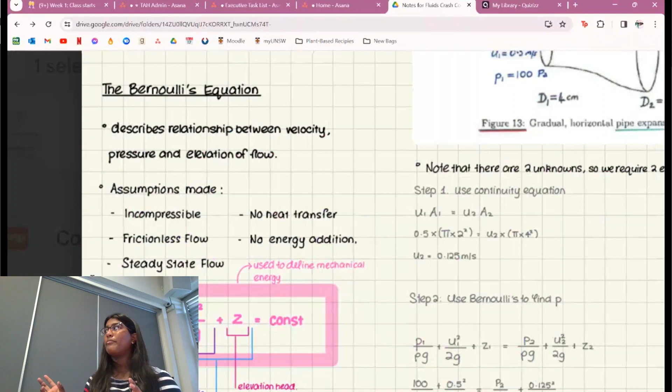It's very important to know how to use it and how to rearrange it, because more often than not, your questions on Bernoulli's equation, which is derived from the general energy equation, will ask you to find one component. So let's say they ask you to find the depth of a fluid, a river, or a tank, and you'll have to rearrange Bernoulli's equation to find that component.

It won't always be so easy as them giving you the density and velocity and using gravity to find Z. They'll use terms like pressure head, piezometric head, and elevation head. You'll need to remember that pressure head equals this section of Bernoulli's equation. So say I want you to find elevation head, Z, and in the question they've given you pressure head equal to A, and piezometric head equal to B. They might not give you symbolic values, but if you know pressure head equals this section and piezometric head equals that section of Bernoulli's equation, you can rearrange it, as long as they give you the constant. Does that make sense? Okay, great.

Assumptions made when using Bernoulli's equation: incompressible flow, frictionless flow, steady state flow. There's no change in temperature, so no heat transfer, and no energy added. This is just the relationship between your pressure, density, and velocity.

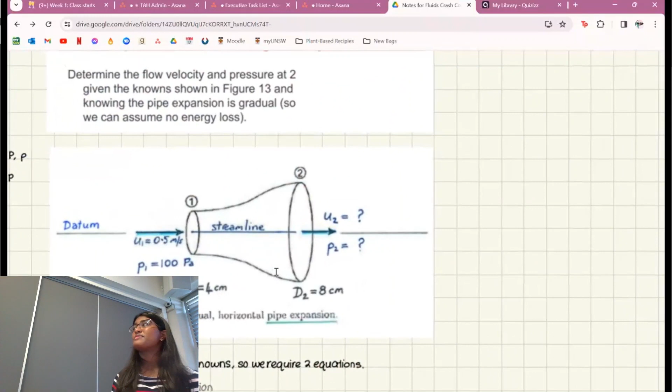Bernoulli's equation makes it even easier to solve continuity problems. This final example is another pipe expansion, but it incorporates both the continuity equation we used in part 1 and the new Bernoulli's equation. Here they've given you the diameters at point 1 and 2, the average velocity at point 1, and the pressure at point 1.

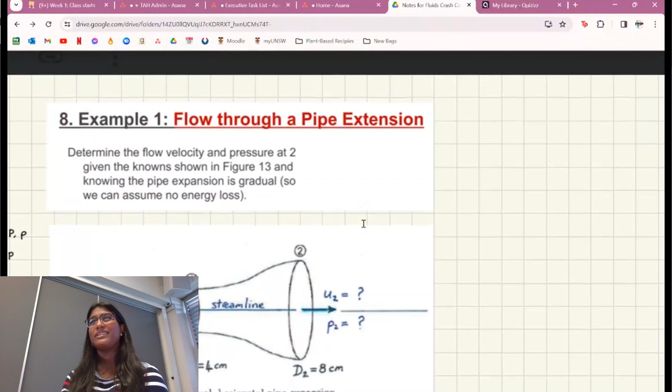So the unknowns - they've given you 2 unknowns. Can anyone tell me what that means, how do you solve the question? I kind of said it before, it's very similar to high school maths. Yeah, you need two equations, right? I know it sounds silly, but it's actually really important to remember, because I remember one time in my fluids workshop I couldn't figure out how to solve a question because I was only using one equation, and I sat there doing a lot of working out. But if I'd just remembered from the control volume part that I needed 2 equations, I would have known how to solve it.

So step 1: the easiest thing you can do in any continuity problem is just use the continuity equation and apply it to your system. You know that at point 1 you've got a velocity of 0.5, and you know the area is a circle with a diameter of 4 centimeters, so you can sub that in as well. Most importantly, that's equal to the volume output, which you know the diameter of, so you know the area, and therefore you've got only one unknown, which means you can solve for the average velocity at point 2. Does everyone understand how we got 0.125?

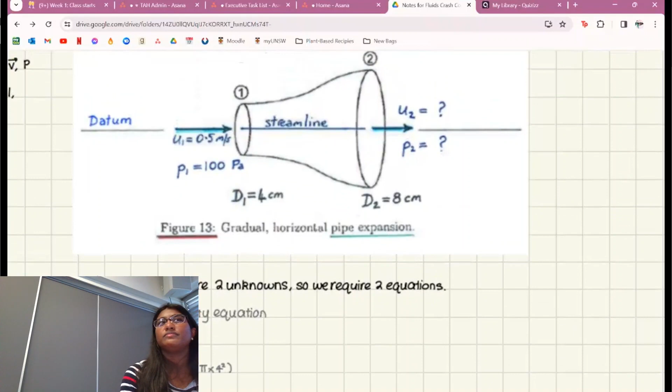Okay, so now that we've got the average velocity, we can use Bernoulli's equation to find the pressure at point 2. It's not too hard, you're just subbing in the values you already know. Be very careful of your units when using Bernoulli's equation, they tend to be quite tricky with those. As you can see, the pressure given at point 1 has been subbed into the pressure head. We know the density is 1,000 and gravity is 9.8, so the pressure head has been solved. Same for the velocity head, because we know the average velocity at point 1 is 0.5 and gravity is 9.81, so the velocity head is also solved.

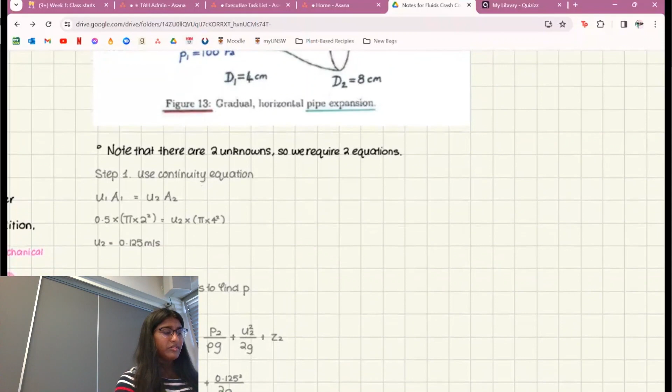We rearrange it so that Z is... oh, actually we don't care about Z, because the points we're examining are in a straight line. So the streamline at point 1 and 2 has no change in depth. If there's no change in depth, the difference in depth is 0, so we can cross those two out and just solve for the pressure at point 2.

This part here I think I forgot to go through during the last fluids crash course, so I just wanted to show you quickly. This is kind of an overview of weeks 5 to 10.

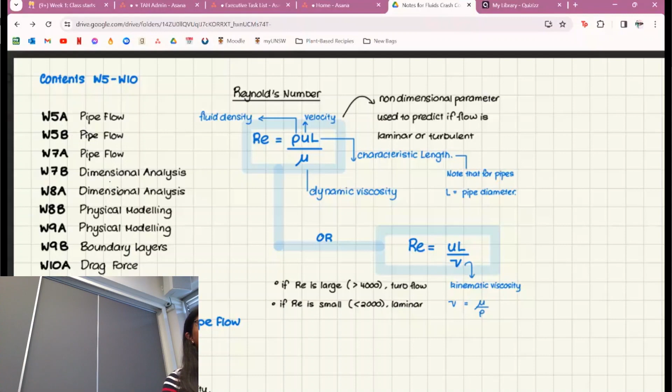Weeks 5 to 7 will be a little bit more about pipe flow. 7 and 8 will be dimensional analysis, which is a bit different to the rest of the course - to be honest, I'm not really sure anymore why we need it, but that's what week 7 and 8 will be about. And then 8 to 10 will be a little bit more about the forces applied to a fluid in a pipe, and that concept will be used to complicate the problems we've gone through together. But that's all for the content.

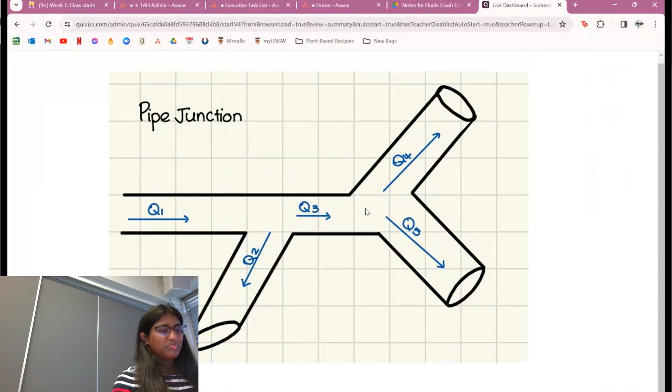This is really good - I think last time everyone got this wrong, but this one's correct because if you consider this to be the input, it's equal to Q2 plus Q3. What everyone did last time was say it was equal to Q2 plus Q3 plus Q5, which was option D I think, a popular one back then. But basically if Q1 is the input, it's equal to all of the output points after that, which means it's equal to Q2 and equal to Q3. Q4 and Q5 would be equal to whatever Q3 is at that point.

Okay, next question - oh, we got this one right as well. Great.

Okay, so residence time - this one's just a definition, so it's just the time taken in the context called bucket hydraulics, which is basically when you've got a storage section and you're letting the water flow out of that storage section, and it's the time taken for the whole thing to empty.

And then - I kind of gave it away - but bucket hydraulics is the term for a situation or system where the water storage varies, so you start with a certain volume and over time that volume decreases or increases. Yeah, we got that one right. That's good, and that's it, that's all.